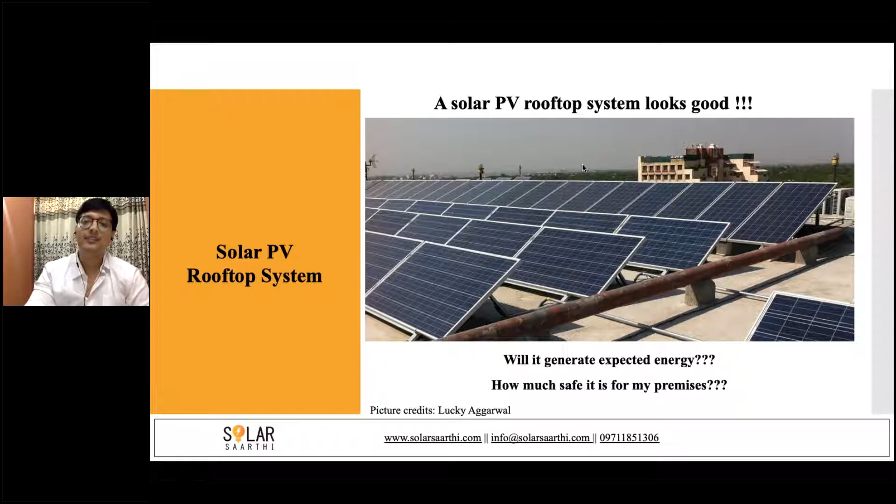Will it generate expected energy, and how safe is it for my premises? These two questions are always in the mind of an installer and the investor who's investing in the plant. So when we install a PV system, it really looks good, right? Blue modules and everything clean, but many things are very interdependent on that.

So there are some issues I'll highlight. First is this news, very famous, I think most of you might know this - that is the Walmart and Tesla issue. Tesla installed solar PV rooftop projects on Walmart warehouses over the country, and approximately 7 rooftops over there caught fire.

So what are the issues with this fire? There are two issues. One is the safety issue - my complete building is at risk, my premises workers are at risk when there is a fire. The second is when the fire is there, the complete project is shut down. That means I have a loss of energy. Energy means I have a loss of money. My returns will be affected because of that.

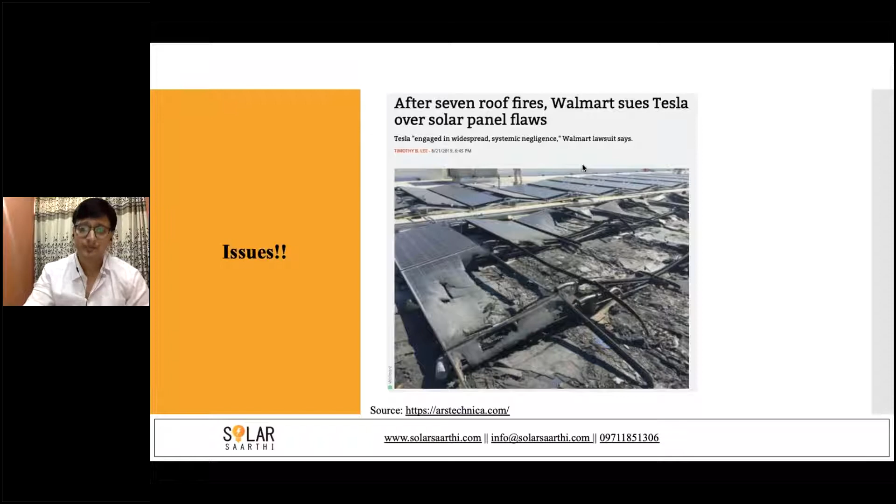Another issue, this one is from India. In Maharashtra, there was a shutdown of a PV rooftop project, and a team of 3 persons went there to rectify that. Unfortunately, one of the engineers died there on site because of a fire accident. So this issue is highlighting the safety of your system.

Now there are some statistics. There's a study done by TUV showing the major causes of defects in a solar PV rooftop project. Installation faults are the major cause at 55%, and the second at 25% goes to documentation and planning faults. So if I total around 70-80%, it goes completely to where workmanship is involved - where we plan a system, where we install a system, where we design a system. That's where the issues are.

There's another study by GIZ and PI Berlin, particularly for the Indian rooftop sector. Different underperforming rooftops were audited, and the findings are shown in the slide. The major issue was soiling - cleaning was not done.

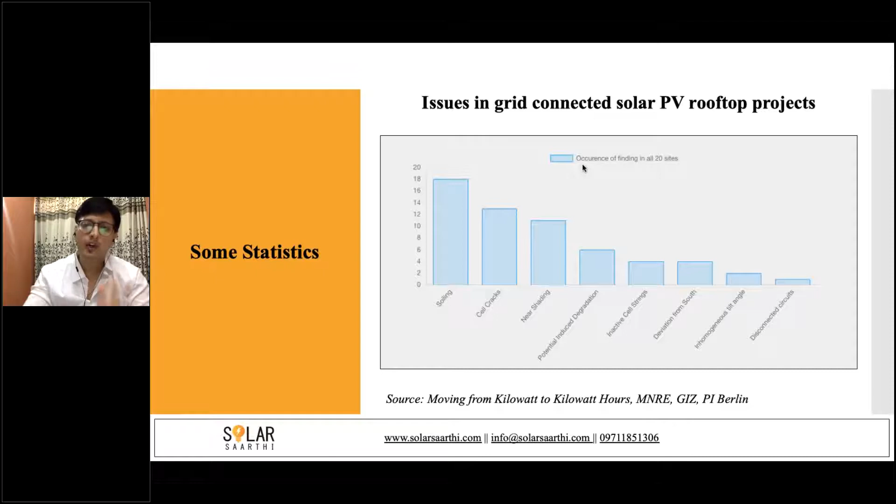Then cell cracks, again a workmanship issue - when we walk over the modules, when someone sits over the modules, there are cracks. Near shadings, again a planning issue - if there's a water tank or a tree beside my rooftop and a shadow comes, there will be a performance loss and a fire issue can occur. So all of these are workmanship issues that we have highlighted here.

I'll take you through the different project phases in project development. The very initial stage is feasibility and planning, then detailed design, then installation, commissioning, and operation and maintenance. All these different phases are interlinked. If I have wrong planning and feasibility study, that affects my design. If I have wrong design and detailed engineering, that affects my installation. If I have wrong installation and commissioning practice, that affects my O&M, and ultimately everything affects my energy generation and the safety risk of my premises.

So if I lose energy, I lose money. I'm not saying that if I'm losing energy, don't promote solar, or don't install solar on residential because you're getting nothing out of it. We have to take care of all the different phases of project development, and while planning we have to be very, very sure. I'll show you a few slides for that.

So I'll not highlight very major issues like micro cracks or module level or inverter level. I'll just limit myself to the planning stage and the BOS item stage. How, without investing a huge amount of money, we can save a lot - that I'll talk about in this slide.

So you can see this poor feasibility and planning. If while planning I've not gone to site for a site inspection while proposing a capacity to a client, what happens is, you can see in this first picture, there's a tree. There's no walkway, there's no way to access those modules to clean, and you can see how much dust is there on these modules.

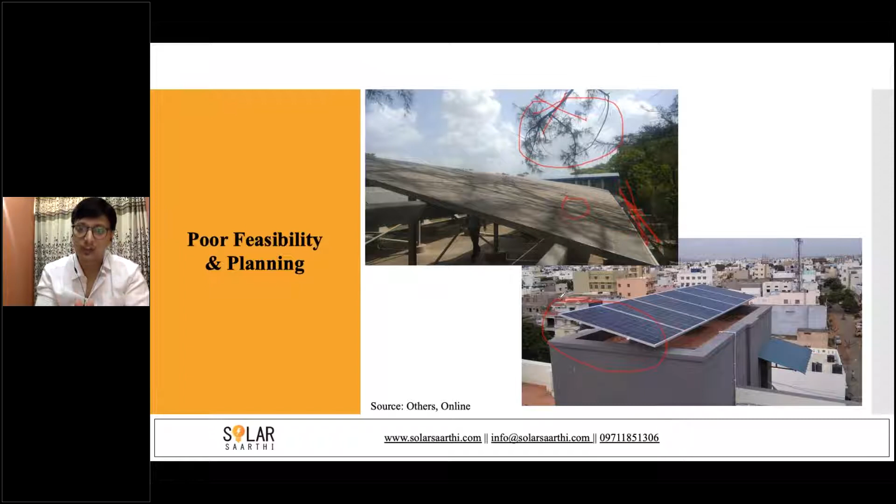Again, second picture is the same. You can see that on the mumty, these modules are coming out of the mumty or the premises area, or the parapet you can say. So these modules will experience very huge wind pressure, and again it is not safe to work on such systems. So it's like I install a system and go back, I never come back to the system. Ultimately, the loss is to the customer.

I'll just share one instance that happened with me a week ago. One of my EPC friends approached me and said, okay Lucky, you have to design a system around 30 kilowatt you have to install on this building. So I said, okay, you just give me the coordinates of the building.

So I conveyed my message to him, and the final result was, 'see Lucky, this is a tender, the capacity is already defined by the client, we are getting into this project, and anyhow you have to fit this.' So when we fit projects in such situations, issues like this will happen - the generation will be low, you'll have safety issues on that. So you have to be very careful when you're planning your system.

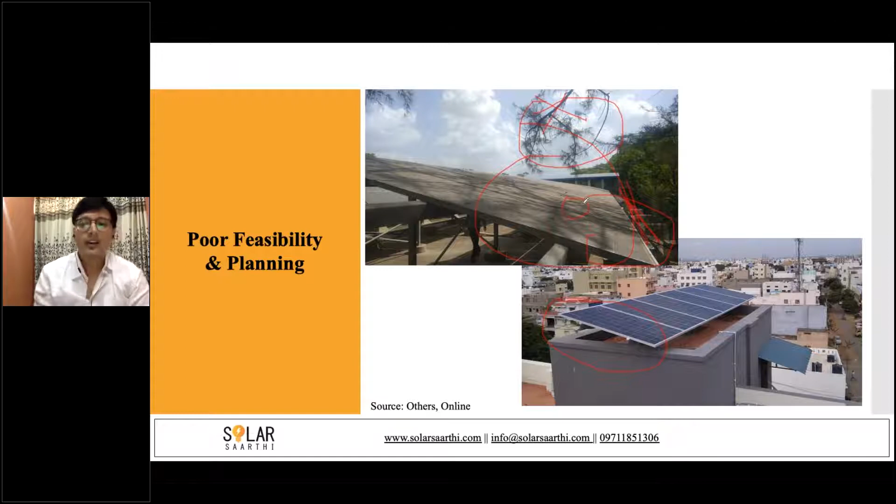Another important challenge that I have seen in my industry is DC connectors, MC4 connectors. People are not taking that very seriously. At present, if you see the range of DC connectors available in the market, it's from 25 rupees a pair to 100 rupees a pair. So there's a huge gap and huge different kinds of products that are available.

So when we buy an MC4 connector, what we usually ask the customer or manufacturer is how much the price is. But we never ask what is the contact resistance of this MC4 connector. If the contact resistance is higher for an MC4 connector, it will cause you energy losses, it will cause you safety issues, it will cause you a fire in a very worst situation. So you should be very technical and careful when procuring such small items.

This will not cause a very huge impact on your overall project cost. Let's say you are using a 50 rupee pair MC4 connector, and 10 pairs are used in your 10 kilowatt project. Right now the project cost of a 10 kilowatt system is something like 4 lakh rupees. So under 4 lakh, if you are investing in 10 MC4 pairs, that is 500 rupees - that is no cost compared to the bigger items. But this small cost will cause you a lot of issues later on in your O&M time and later on issues at the site.

So what are the major issues? Inferior quality, improper crimping. I think many of you would agree with me that on site we only do that quickly - we want to finish the site, so we don't have actual proper access to the tools.

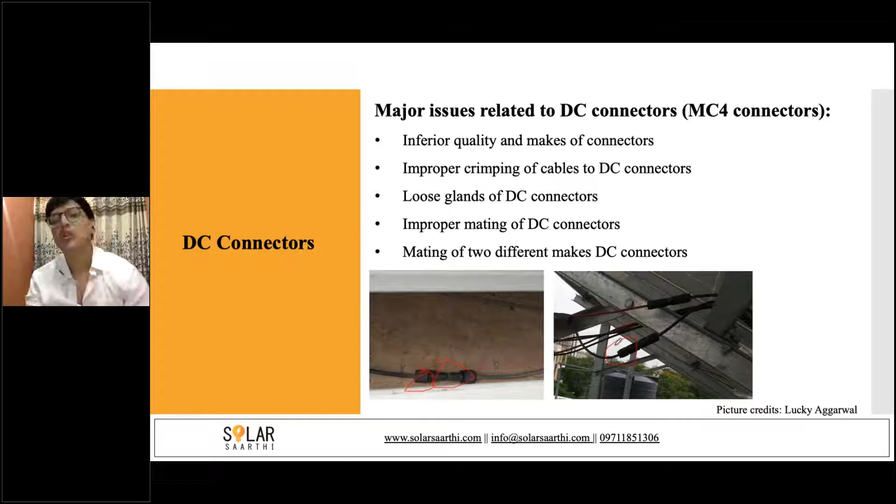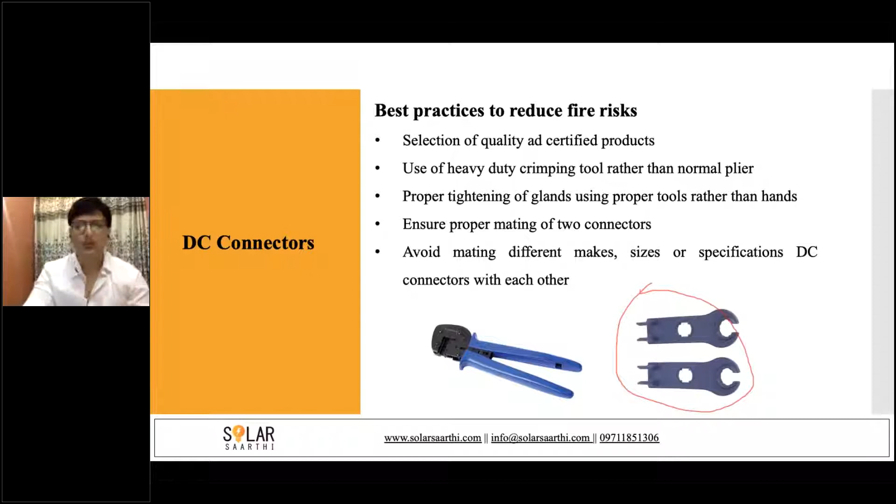But there are some very simple best practices you can adopt to reduce those risks and increase energy generation from your plant: selection of good quality components, using a heavy crimping tool, tightening of proper glands, using the proper tools to tighten and open your MC4 connectors. These tools are available and not very expensive, but by using them you can save your system from future damage.

Another thing is your DC combiner boxes. I think everybody will agree with me - nowadays your SPDs, isolators are on the inverter itself. So many people say what is the need of DC combiner boxes? But yes, there is a need - when you are doing maintenance, when there is a safety threat, you have that DC combiner box readily installed in your system with good design.

So what are the issues? Open combiner boxes that we do not close on site, drilling into the combiner boxes, improper gland sizing, many cables into a single gland. If you see this picture, there's a single gland with many cables in both glands. The purpose of a gland is to hold the cable so the stress on it is less. But when we do such practices, there's no use of that gland, and the result will be a fire case - a complete fire. If you install these combiner boxes beside your modules, 99% of the time we do that, then your module is also at risk of fire.

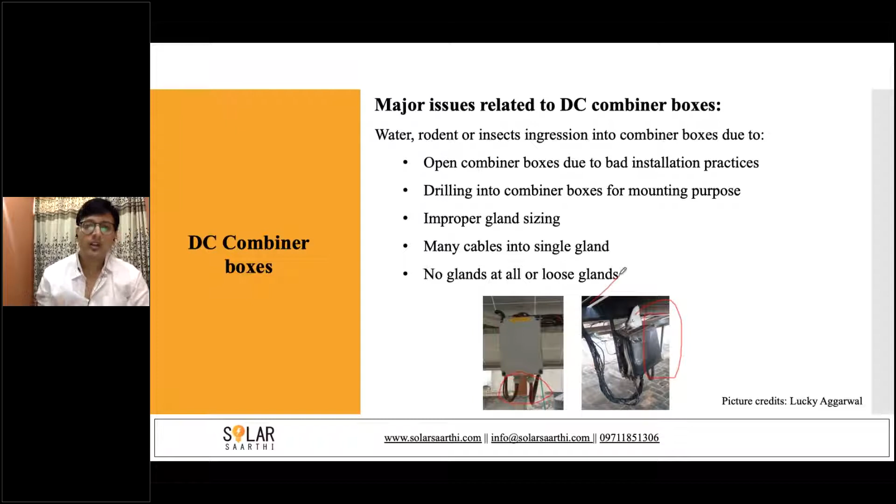So what are the best practices? Again, very simple: use one cable per gland. That should be the bylaw we follow in this solar PV rooftop industry particularly - one cable per gland, and the gland should be properly tightened and properly sized for that particular cable. If you are using a 2.5 square mm cable with a 6 square mm gland, there's no use of that gland.

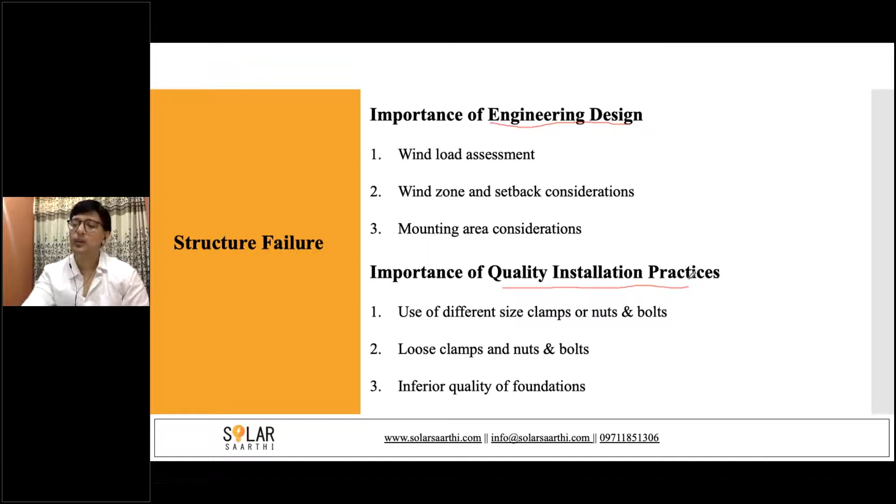So this was till now - 2-3 points I covered for electrical safety. Now structure is again a very important issue you need to follow. I showed you a picture where the complete system was uprooted. So I have quickly given two basic segments we should look upon: first is importance of engineering design, and then importance of quality installation practices. These two factors we should take care of whenever we are planning or installing a system.

So how is engineering design important? The very first is wind load assessment. The current practice is that we use one design for all systems - that is not true. If you are designing a system for a 2-story building in Delhi, that cannot be copied or replicated on a 20-floor building in Delhi, because the wind speed on 2 floors and 20 floors is very different. A 20-floor building will experience a much higher wind speed.

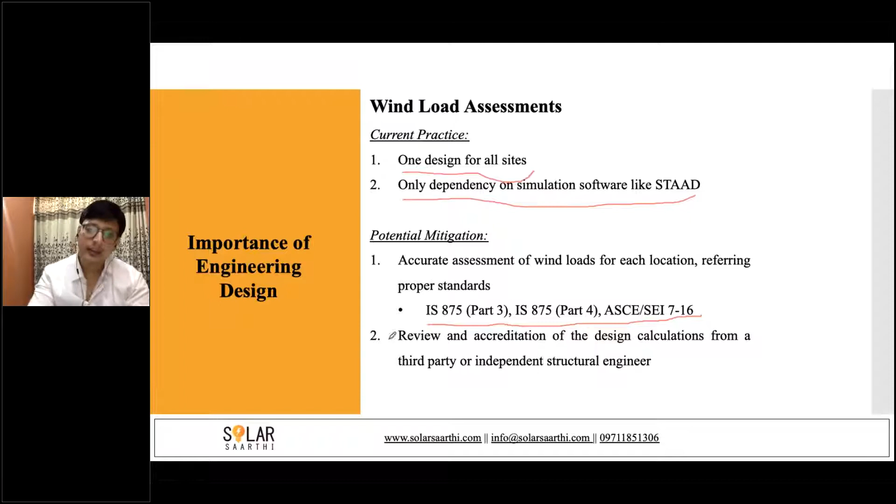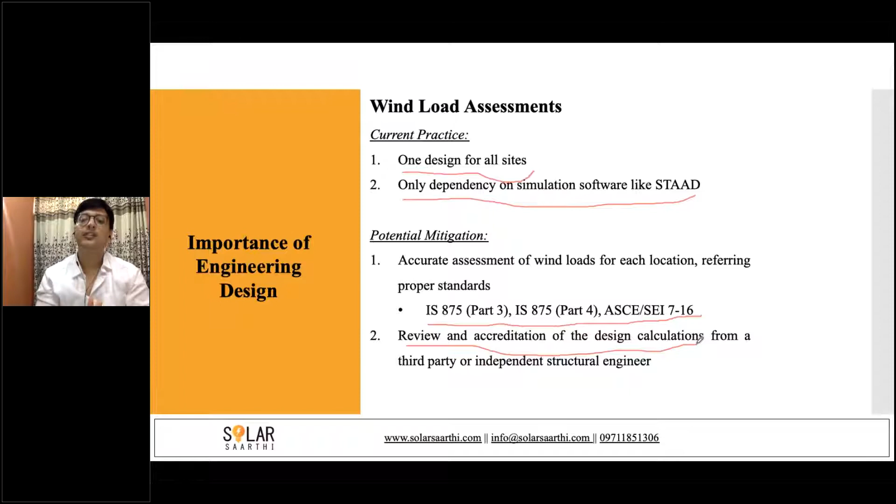So you need to design that system or structure based on that. Again, we have only dependency on simulation softwares, but simulation softwares are not the solution - they are a black box. Whatever you input, they'll give you an output. So if your wind load assessment input is not correct in a STAAD software, the output will not be correct. What is a very easy potential mitigation? Use Indian and international standards to calculate the accurate wind speed, then use that wind speed in your STAAD software or any software to calculate the structural design, and then get that design reviewed by an experienced independent structural engineer - not an electrical engineer, not a solar expert, but a structural engineer.

Wind zone - again in the first picture I have shown you, there's a second picture.

You can see these modules are outside the premises of my building roof.

As you can see in this picture, there's a study by Solar Under Storm Part 2. This shows that you can use standards like ASCE and other Indian standards to calculate wind zones. Once the wind zones are calculated, you have to see where you need to install the solar PV system. Usually the edges of the building experience very high wind speed.

That is why it is recommended to have a setback area or keep out. There will be two benefits of leaving a setback: first, the wind speed will not be into a danger zone; second, O&M - I can easily do operation and maintenance of my system.

This is linked to your planning and feasibility stage. During planning, if I have not done good planning for this particular array, then I have to face challenges during O&M stage or later when the customer is taking care of the system.

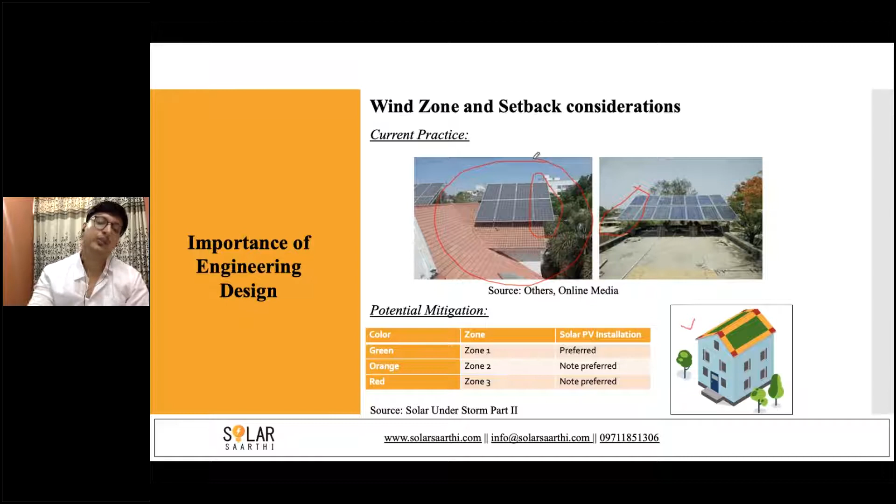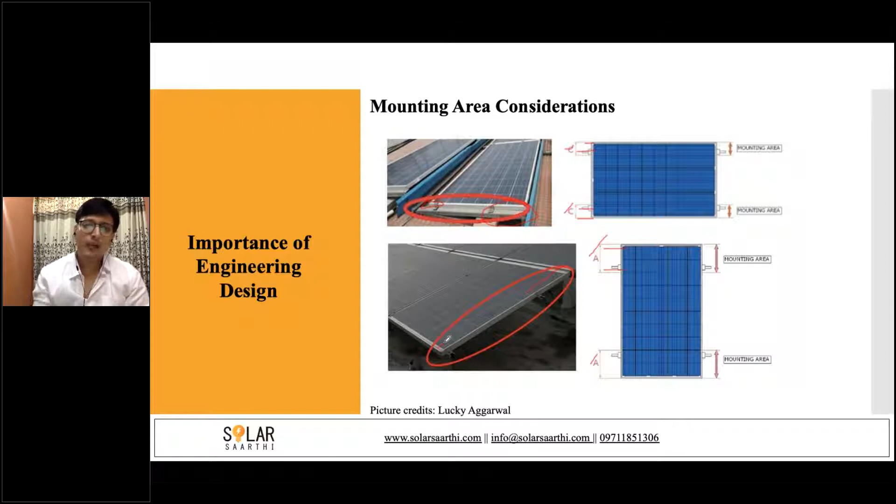I just tried to finish the project quickly, so I used that. But if such a situation persists, with passing time - contraction, expansion, vibrations - and if this nut loosens up, then your system will be flying in the air. It's very dangerous from the safety point of view and from the generation point of view.

Each module manufacturer and structure manufacturer usually gives you the torque range for tightening up the bolts. You have to mark a torque line on the nut bolt and tighten the structures accordingly. Again, we're not following that.

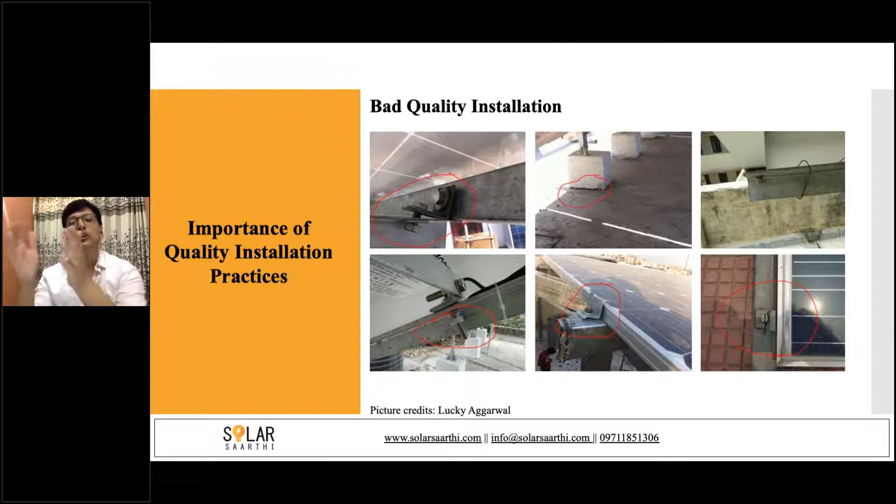I'll conclude my session here with three major insights you'll have to take care of. One is capacity building - you have to transfer knowledge from you to the actual installation team working there. Properly design your system, properly select the BOS items. That's all from my end. I'll open the session for questions now. Thank you all for listening to me for this webinar.

Thank you so much, Lucky. Really informative session, thank you for that information. I think you talked about various electrical issues, including structural issues. People should now be aware of the necessity of using good connectors, proper tools, crimping the wires, and proper earthing. For example, combiner boxes - they should consider the value of combiner boxes in PV installations, and the role of cables as well. So I think you touched on a part which is presently neglected in solar PV installations, because a lot of EPCs are coming up and are more concerned about pricing, but they neglect the quality part. So thank you for touching on that quality part.

Now I will request Hartwig, if there are any questions, we can take one right now. If there's any question coming up in the chat box, we can take just one question at the moment, the rest we can take in the Q&A session. I have two questions I'd like to transfer to Lucky. One question from the audience is how to select MC4 connectors. Could you maybe shed a little light on that?

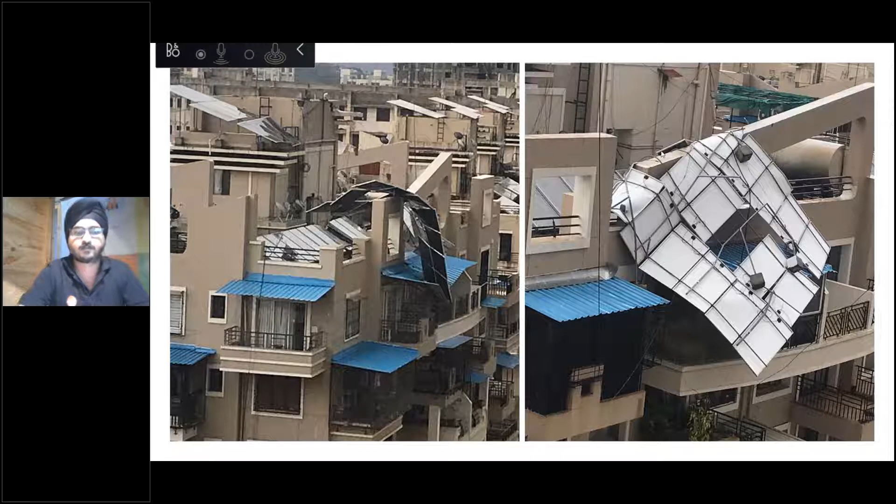I'll just touch on the small part. What are the factors which influence the roof? There are wind loads, and you also need to see the roof conditions, whether your roof is stable or not. And then also the fixation method, because it will decide whether it's able to sustain the wind speeds in that region. Also the inclination, weight, and size of the modules are very important while deciding the structures.

So you need to consider this basic part while designing structures, otherwise you are going to make a big mess. I hope you should consider this in your future installations.

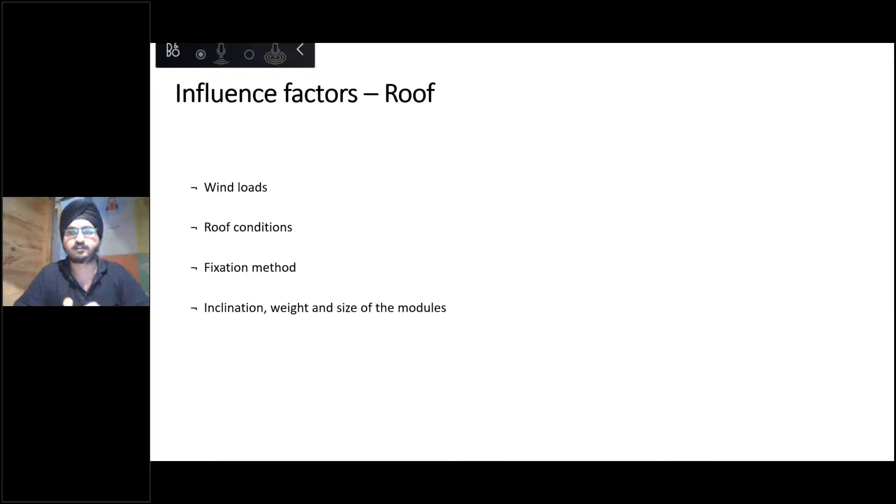As I said, apart from these, there's also wind speeds you need to consider based on local wind conditions. You need to understand that wind is different in different areas. In coastal areas, the wind pattern can be different. In open fields, it can be different. Rural, it can be different. And urbanized, it can be different.

So you need to consider not only the wind speed, but also the terrain category, because terrain category will define the effective load which the structure, roof, and module has to take. You need to make sure all these three things can take that wind load, because otherwise you will see pictures like this in your future installations.

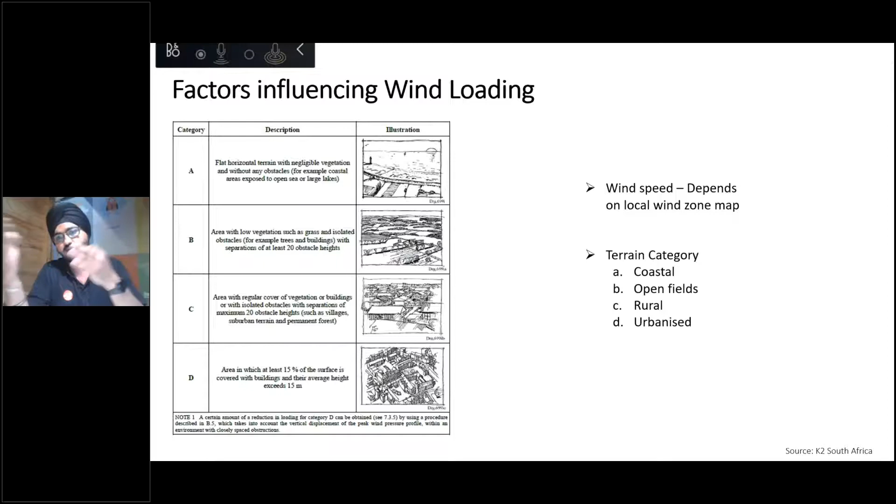If you plan your system better, you will also save cost. As Lucky talked about, you cannot install the panels on these zones basically. So I'll show you the first layout where 36 roof hooks were used, but it was not verified because it was on the zones.

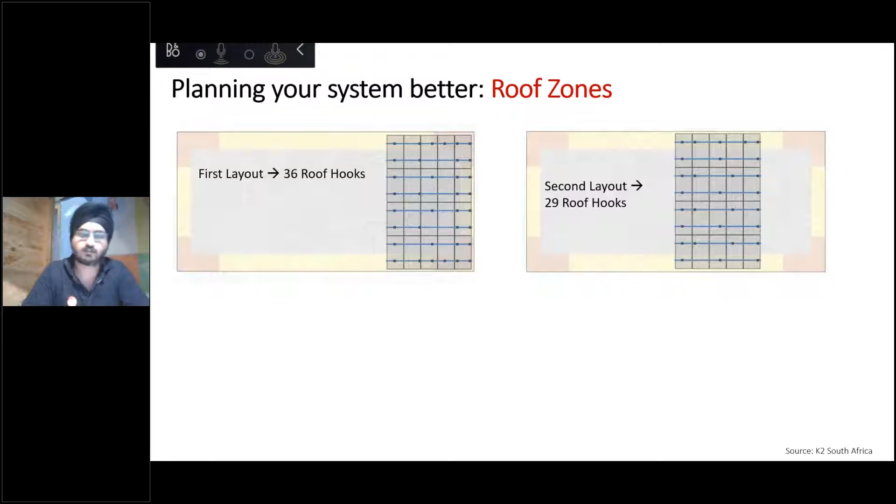In the second one, you put the solar PV somewhere more in the middle, but there you used 29 roof hooks, and that system is also not stable. But if you plan in a nicer way, you just need 24 roof hooks and the system would be verified. The idea of telling you this slide is that planning is really important.

Planning will also save you cost, and will help make sure the system is verified and able to sustain the wind loads. A lot of focus is put on electrical planning because of course it will give you a lot of money, since you are producing electricity. But if you neglect that basic part, if you neglect the structural part, you will damage, as I said, the solar inverter, solar panels, structure, and your reputation as well. So you should not do that.

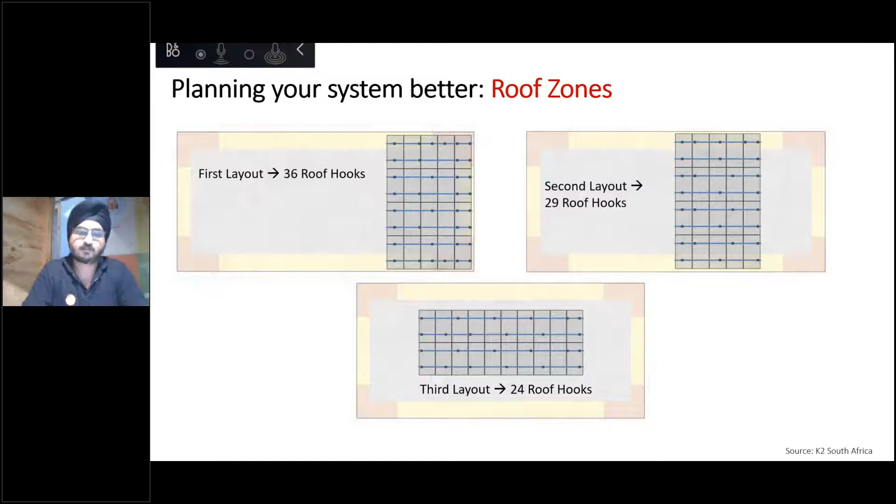Now, before going to the online tool, I would like to explain a little bit about our company. K2 Systems is a very old company, not just a recent one. It's more than 17 years old with more than 180 employees. If you talk about installed capacity, it's more than 10 gigawatts, and we have faced very few problems so far, and those problems were negligible. We have a lot of experience in solar PV installations, and we know what factors need to be considered, especially for the structures.

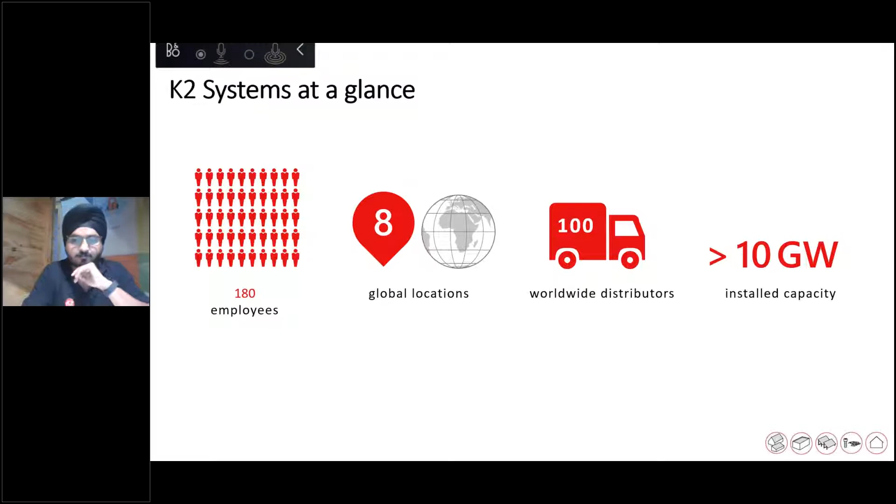And talk about our worldwide locations. You can see we are almost everywhere in the world. We have our subsidiaries in various parts of India, and soon we also like to establish one subsidiary in Delhi, where I'm sitting at. And if you talk about our worldwide installations, you see our installations has been everywhere in the world, whether it's from east to west or from north to south. We have our references all over the world.

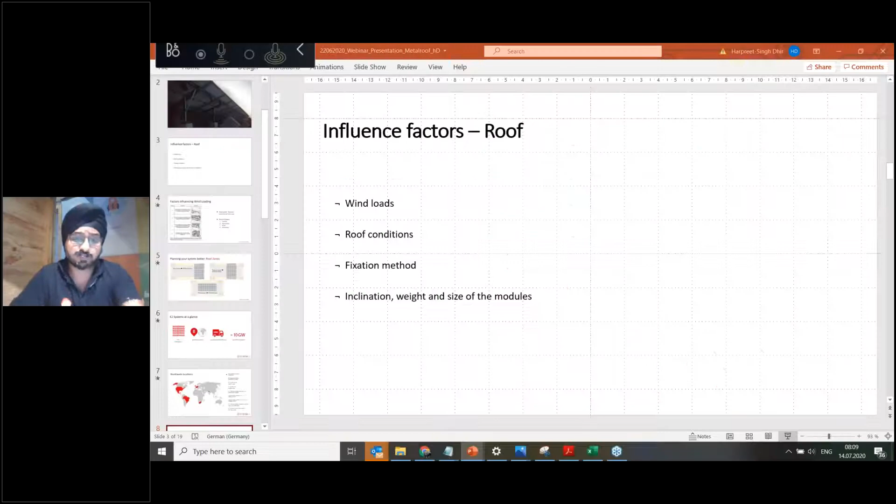So now, ladies and gentlemen, I would like to tell you about an online tool. There are some factors which I talked about in my presentation, what factors need to be considered. But now I would like to talk about an online tool called K2 Base, which is free of cost. This tool will help you do at least the mechanical planning in a very effective way. And if you really follow these steps which I will explain, you will be able to plan a smaller installation in less than 5 minutes. This will also ensure that your system is stable, because we have incorporated all the things in the software, and it will tell you, considering the wind load and wind patterns, whether your PV installation is verified or not. So I hope if you are excited to know about this tool, please type yes in the chat box.

Okay, so let's begin our online tool. As I said, this is a free of cost tool, and what you need to do in order to open an account on this, you need to go to this URL called base.k2-systems.com, and then you just need to click first log out to show you how you need to create, to be a member of this.

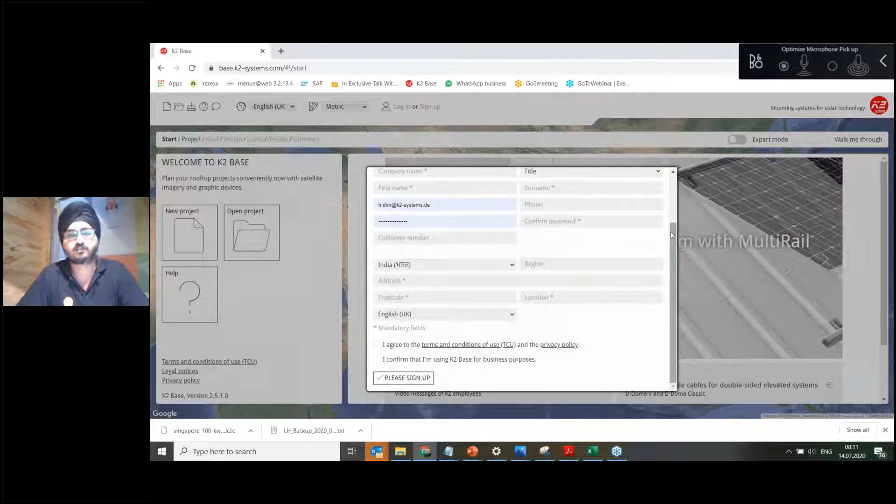So you just need to click on this sign up button, and it will ask about your company name, first name, and so on. You just need to fill up this small form, which will roughly take less than 1 minute, and then you need to click on this sign up button. Once you do this, we will receive your request, and normally within 24 hours, you will get a reply from us with your username and password, and then you can start planning your projects. So don't forget to do this step. Please do go to base.k2-systems.com and register yourself so that you can start planning your PV installations in K2 Base.

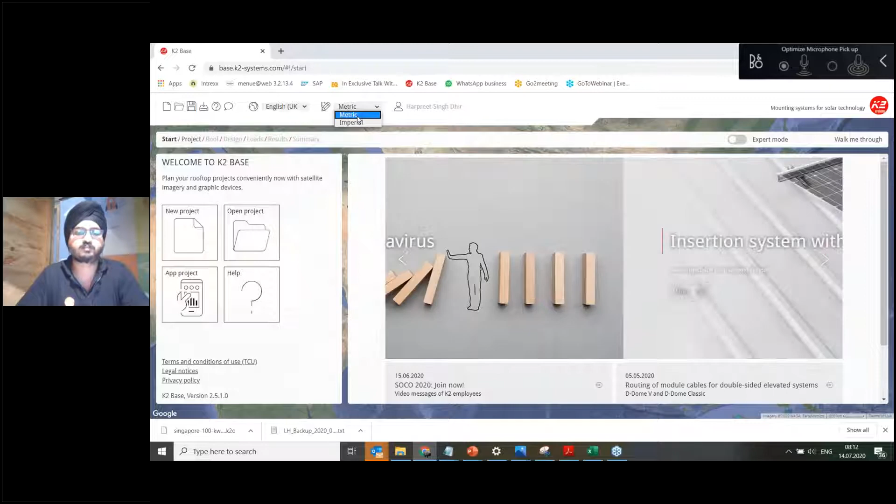So now let me go back to my username and password, let me log in inside the K2 Base. Before going to the project, I would like to tell you that in K2 Base, you can work in both metric and imperial. If you are interested in inches and so on, like in the US, you can choose imperial. And if you are interested in mm, you can choose metric. I normally recommend, my favorite is metric, because most of the solar module data sheets, all the data is mostly in millimeters, so it becomes easier to work in metric. But if you are more convenient using imperial, you can choose imperial as well. And this tool is available in 18 different languages.

And then you can also download this project file, it has an extension called .k2o. You can also ask Sherpa, it's like a robot which will answer your questions. You can directly write to Sherpa as well. And then basically in this online tool, you just need 4 steps, ladies and gentlemen, just 4 steps. You can do the complete mechanical planning using this K2 Base.

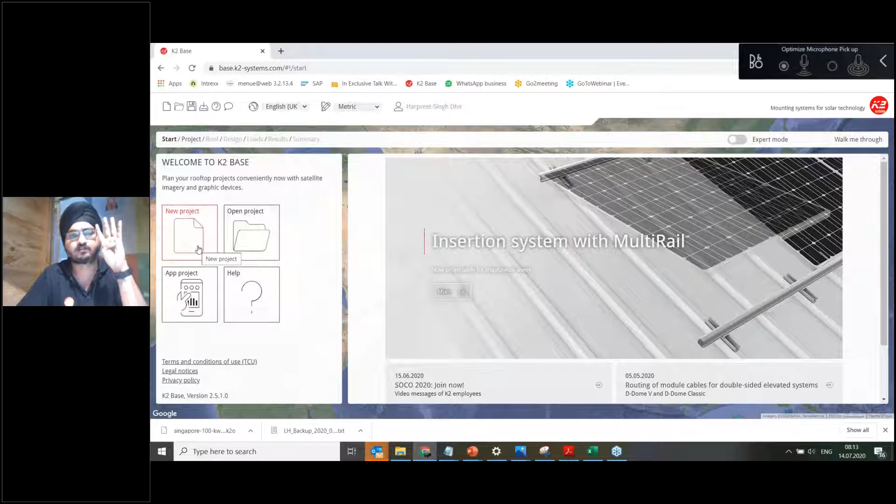So first I will move to the first part, which I will click, called project. I will click on new project. The first part basically is defining the location of your project, nothing else, just defining the basic things. So what I'll do is I've chosen a location in Bangalore, and I will name this project as Bangalore project, and author is myself. And then you can choose a customer, and I can choose a customer, in this case, from Lucky Solar Tech Sarthi, and for example Lucky Agarwal is the customer name. So the first part is finished, I've done the basic part. I define the customer name, contact. You can leave it blank also, these are not mandatory. Mandatory is what you will do on the software, or what the software will give you in return.

So once you've done the first part, project, then the second part is the roof. You need to click on the roof, and then you need to zoom in on this Google map. You can either choose hybrid or satellite image, but I prefer a hybrid image. And then what you have to do is, similar to other simulation tools like Helioscope etc., you can construct a roof on it. You need to click on this add button, and then define whether it's a mono-pitch roof, a gable roof, or a flat roof. In this case, my roof is flat, so I will click on flat roof, and I will click on rectangle, and then I will click on add. And then I take one of the edges using my mouse and draw over it.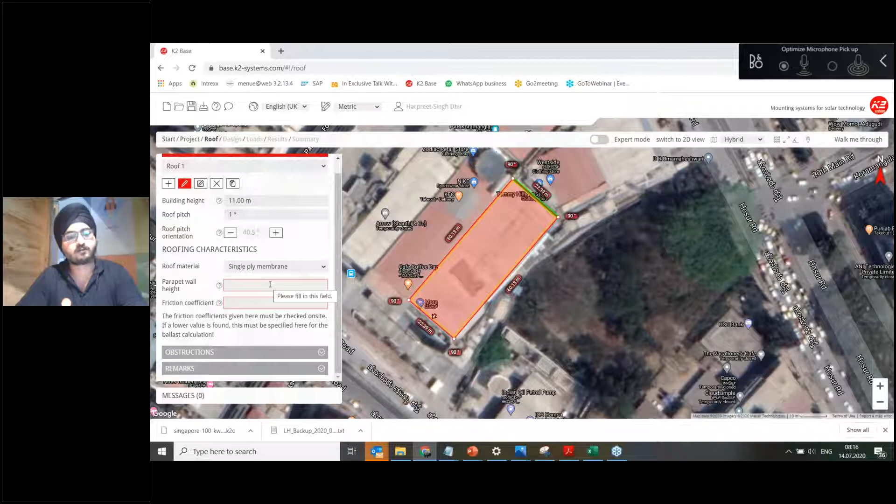And then I also will define the parapet wall, because the parapet wall will also give you some kind of shading. So you can define this, and also most of the rooftops in India come with a parapet wall, and people also say this is a safety wall. So it's normally 1 meter in height, and then you can also set the friction coefficient based on the material of the roof. In this case, it's 0.6.

So ladies and gentlemen, I will be touching only the basic part of the K2 base. The advanced version, I will do in another separate webinar, considering the time constraints. So don't worry about that.

So the second part is finished. The roof part is finished now. Now let's begin with the third part, which is the most important part.

I would like to highlight here that you can also construct pathways for cleaning if you need, and you can also do a shading analysis for obstructions as well. I will show that if you're interested in the advanced version of the K2 base webinar. But I would like to highlight that this is also possible with the K2 base. You can do the shadow analysis also, and you can create walkways as well.

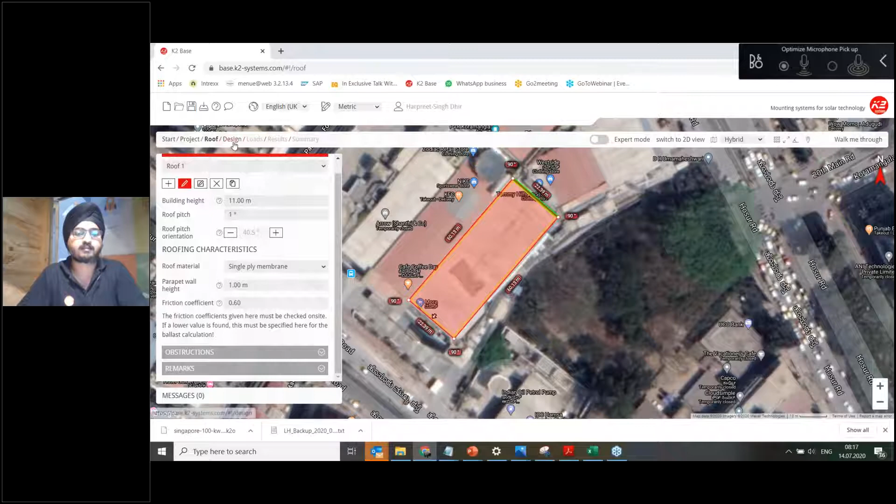And then the third part, ladies and gentlemen - we are finished with the two parts. Then you click on design. And in the design, you need to define which solar modules you want to use for this project.

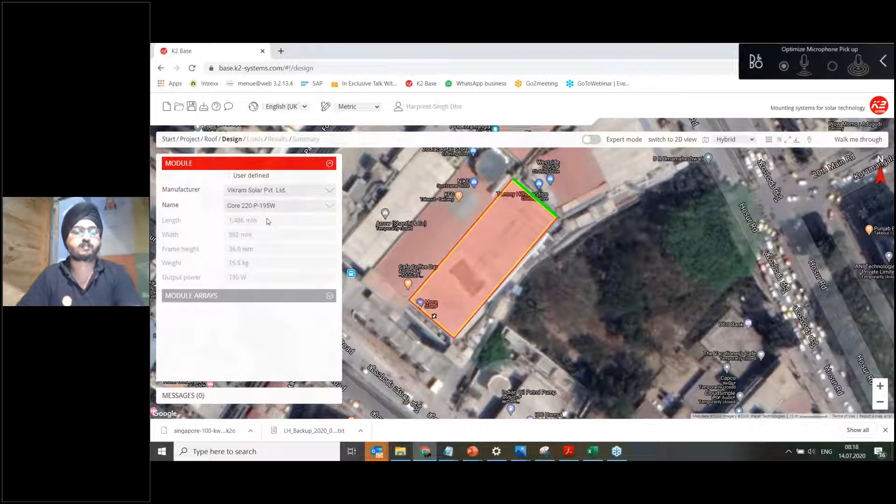So I will take one of the popular module manufacturers, in this case Vikram Solar, an Indian solar module manufacturer, and I will consider, for example, a higher watt module - let's say Eldora 335 watt. And then once I define the module, I will define the module array.

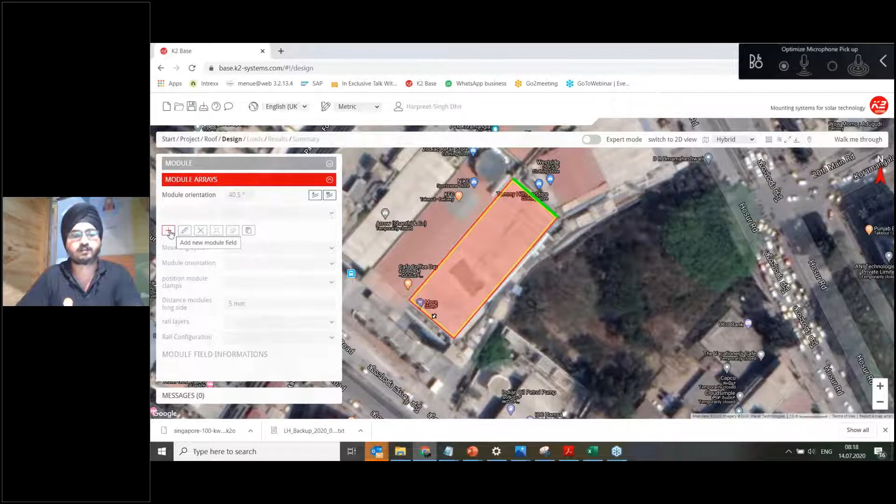So you need to click on module array, and then you need to click, the same way you clicked the plus button for creating a roof, the plus button here for creating a module field as well. So just click on the module field, and now it will show you all the products available for the flat roof, and you can see the new feature which was just recently incorporated.

It will also tell you which would be the most favorable product for this installation. So it's showing - if you just want a single-side-facing module, then you click on S-Dome V10. And if you want double-sided facing, in this case southwest and southeast facing module, then you can use D-Dome V10. But I will choose S-Dome V10 in this case.

And then I had an option of either choosing complete roof or a module field. So if you already have a module layout defined by yourself, I recommend you click using module field. But if you haven't defined one, and just want to utilize the complete roof for the solar PV installation, then just simply click on complete roof.

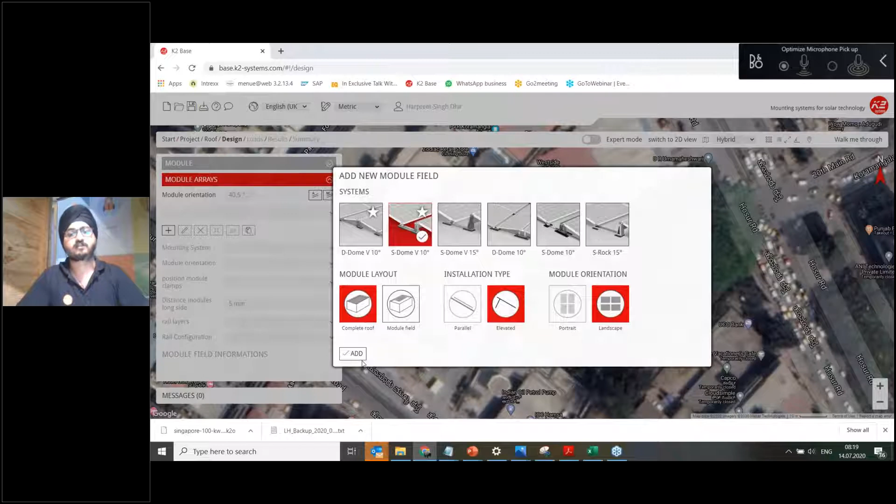So I want to install maximum on my roof, on this roof. So I just click on complete roof, and then I just click on add.

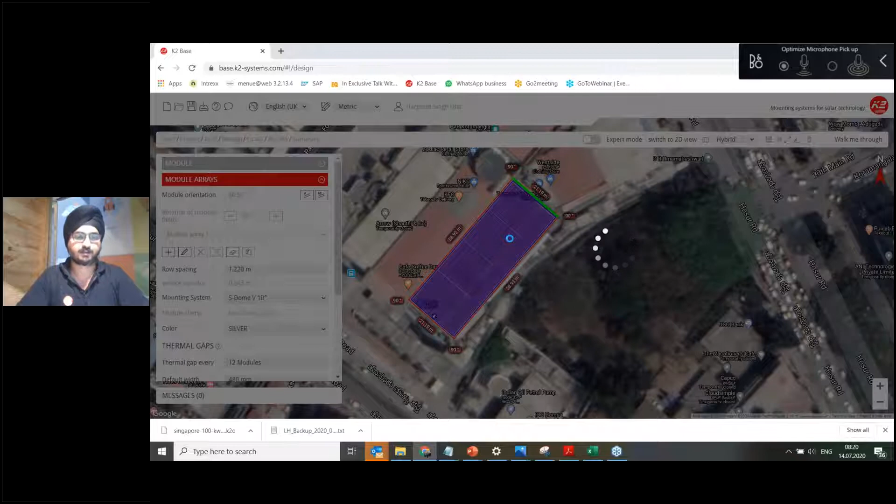So a module field has been created. You can see in the bottom, this is a PV installation of roughly 157 kilowatts. You can also simulate using a double-sided PV installation, and you'll see the PV installation will increase, because then you don't have to leave much space in between the rows. So you can play with this as well.

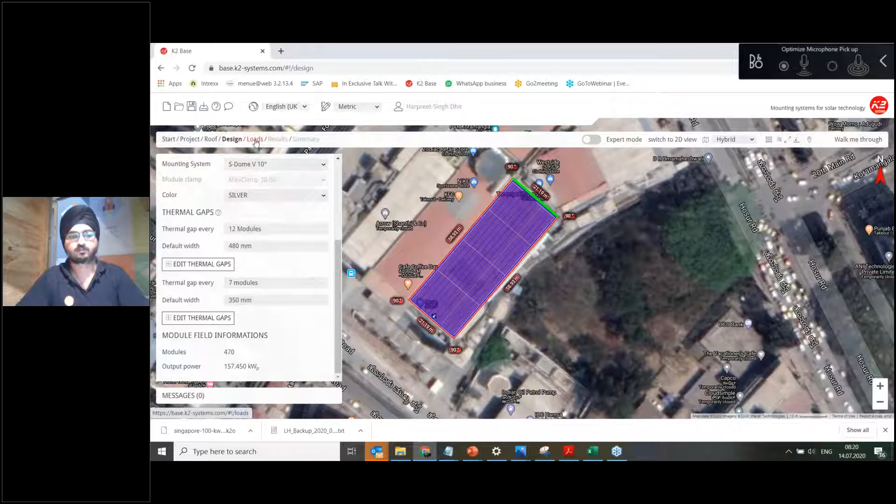So you're complete with the third step, ladies and gentlemen. So quickly complete it. Now you're complete with the design part. Now comes the last part, and the most important part, which is an indissoluble part of PV planning: consideration of loads. I will click on loads.

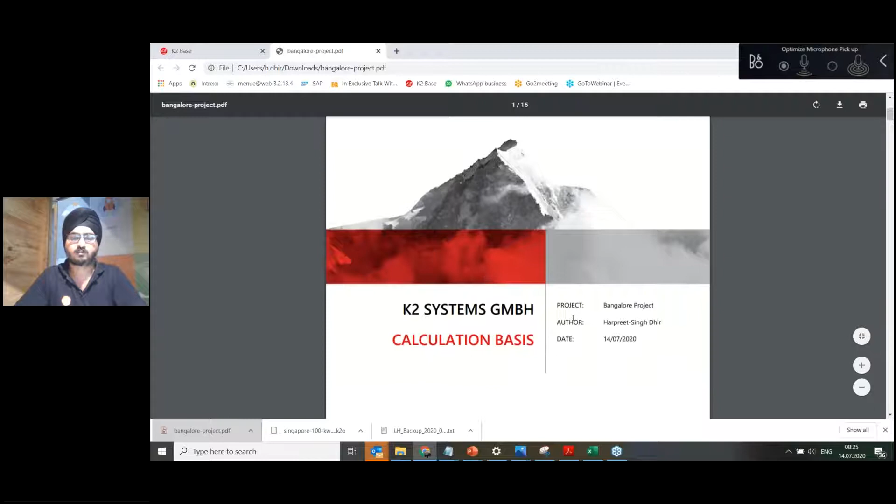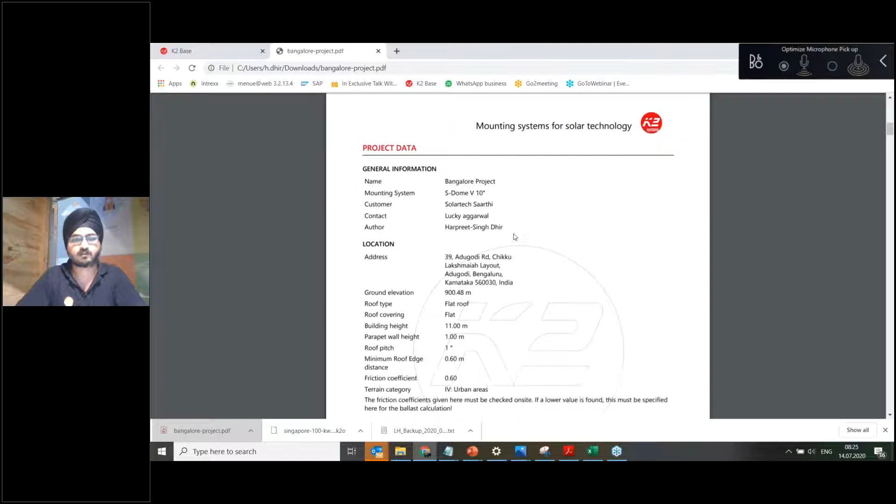So you see now a 15-page report has been created, and the first page talks about the project, the author, and the date when it's done - it's done today's date. And then the report is divided into various parts. The first part talks about the project data, the address, the type of the roof, the customer - Solartech Saarthi in this case.

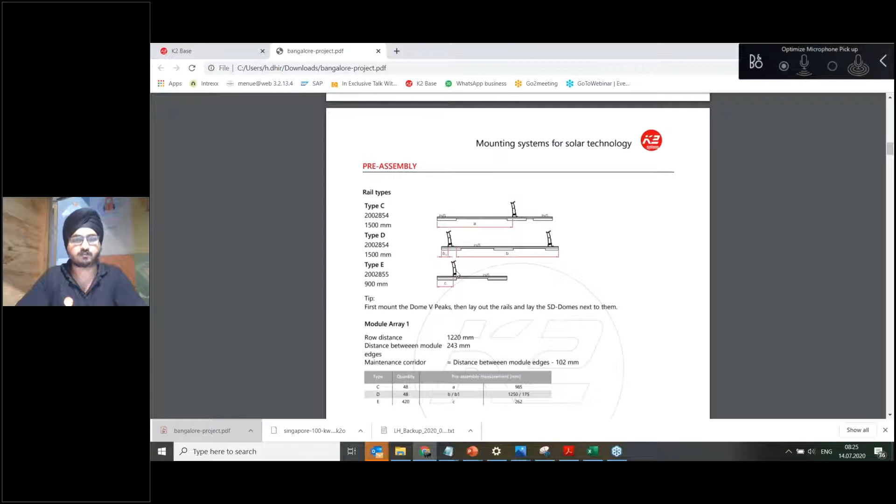Loads, modules you consider, then also pre-assembly instructions with diagrams, then also the assembly plan. You can actually take a printout of this assembly plan and give it to your installer - this will make the life of the installer very easy.

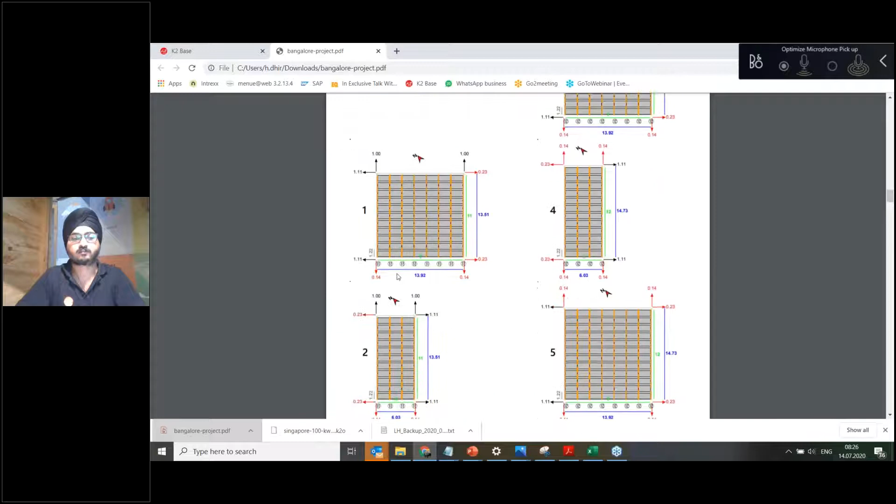Then it talks about various loads acting on it based on defining each block. So this block of 157 kilowatt is divided into 8 blocks, and for each block it will tell you the forces on the edges and the sides. So each block it will take.

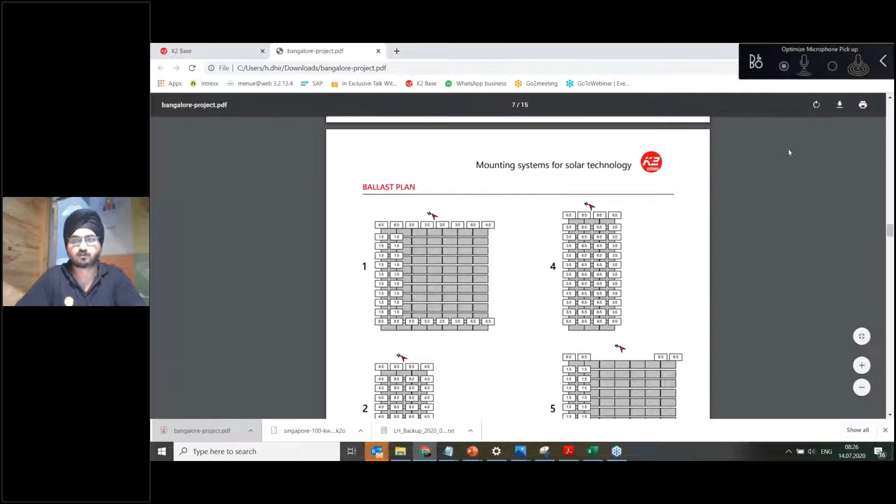Then it talks about the ballast plan, how much ballast you have to put - this will also talk about that as well. So you can zoom in and see the ballast values are not so high, so you don't need to put ballast everywhere. So for each block you will have an individual ballast plan as well.

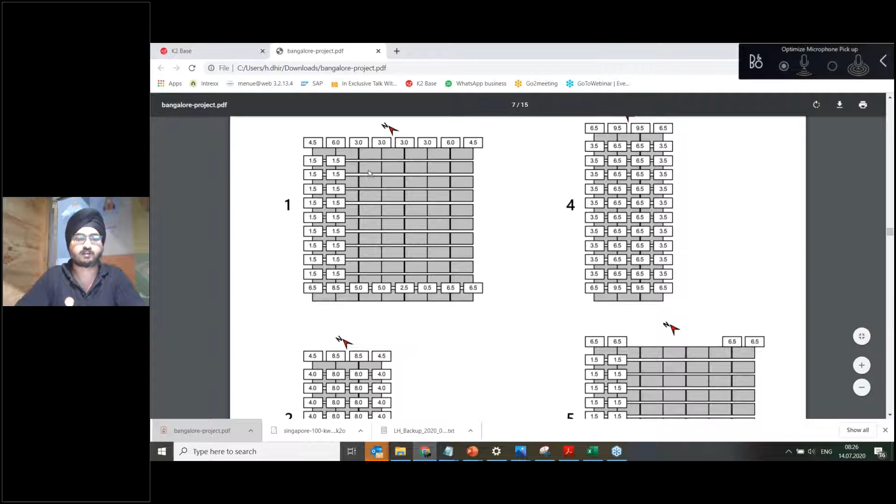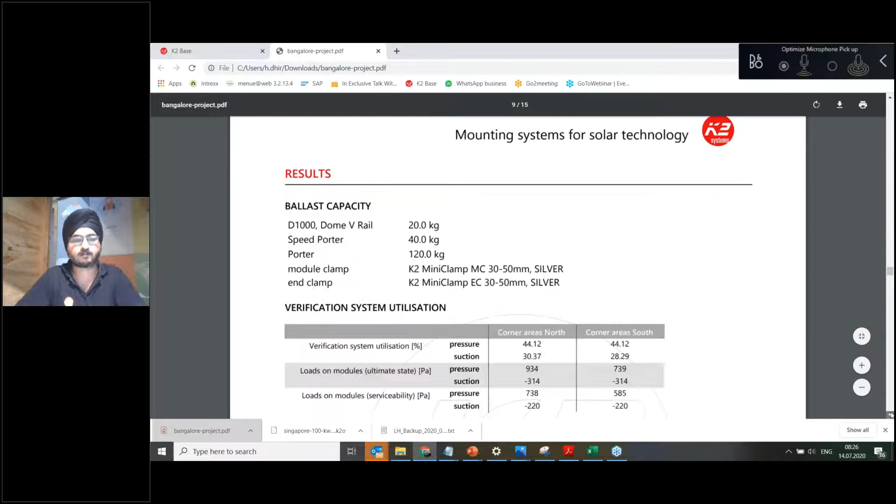Yeah, that's it. Now, very important, this talks about the dead load. In this case, it's 13,062 kilograms of dead load you are putting for this 157 kilowatt installation.

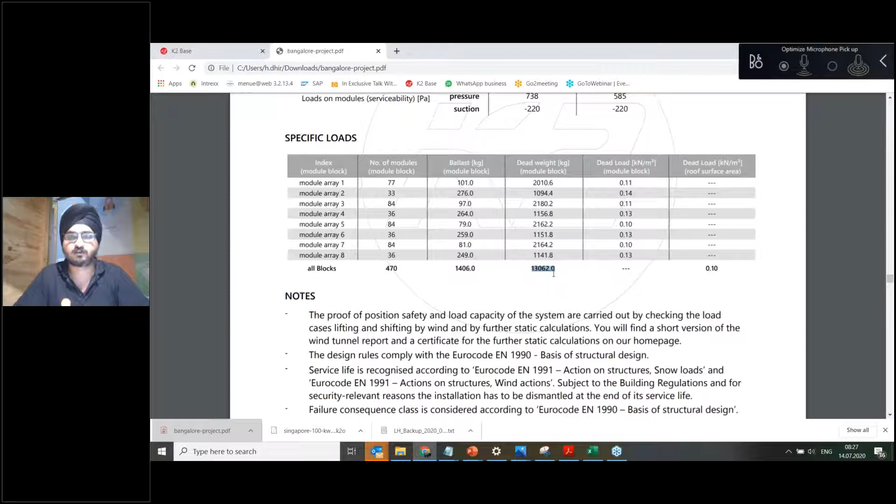Because this tool is verified, this will be considered. We normally give you 12 years of warranty for solar structures, but we don't guarantee whether your roof would be able to bear this much weight of the complete system. In this case, the complete weight of module and structure comes out to be 13,062 kilograms. So for that, you need to hire a structural engineer, because it's the task of a structural engineer to assess whether your roof is strong enough to sustain that much load or not.

So it's not just that, as mentioned by Lucky in this presentation as well, you need a structural expert who will ensure that this roof is safe to bear that much load of a solar system. So we even give values for the structural engineer, which make the task easy. You just need to go to the structural engineer and say, we have this much weight we are going to put on our roof, please tell us whether our roof is strong enough to bear that weight or not. Once he says yes, then only you should go ahead with the next steps.

But on the other hand, what we found out is that for a smaller installation, people aren't interested in putting extra money for hiring a structural engineer. In that case, if you are confident enough yourself that your roof is very strong, then you can also take your decision, but we will not recommend that. It's better to hire a structural engineer and make sure your system is able to withstand that much dead load of the PV modules and structures.

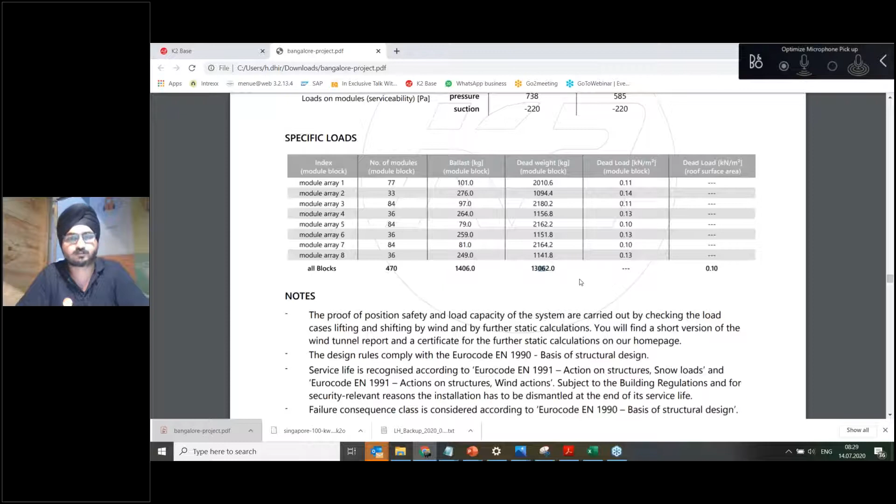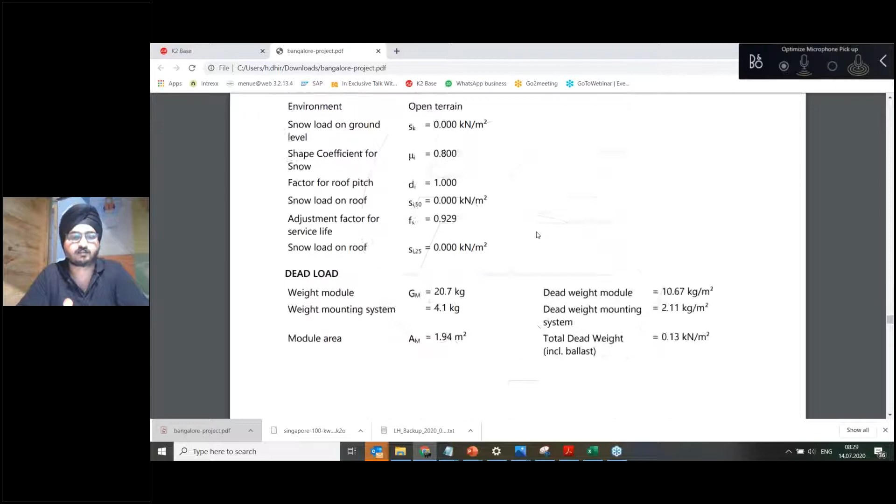Then the interesting part, it talks about the structural analysis, various formulas, various stress strain velocities it has considered in the PV system installations. And then it talks about the way stress is developed from top to bottom, with diagrams. Then in the end, it talks about the bill of materials.

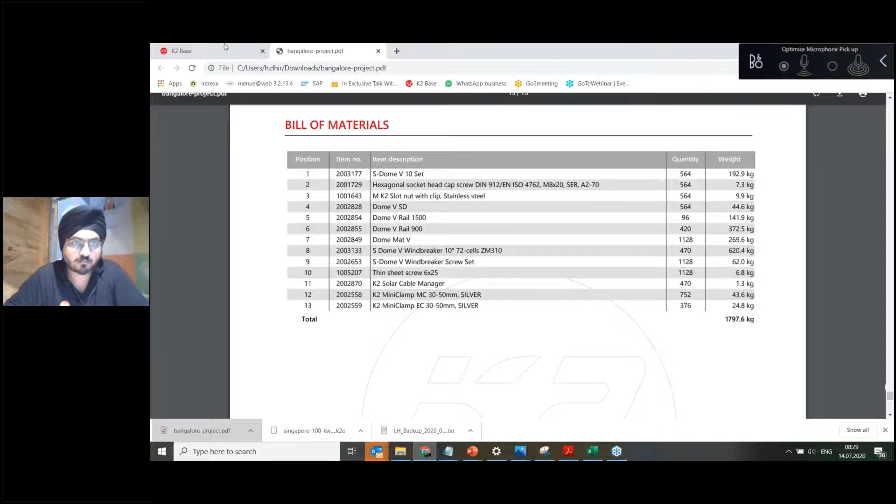I'd also like to highlight here that you can get a ballast value in terms of number of stones, just by clicking here. You define the number of stones and the weight of each stone, for example 5 kilograms. Then instead of giving values in kilograms, it will give you the ballast plan in number of stones.

Second, you can also download the ballast plan. I will download the ballast plan here instead of the complete project. This file is smaller, so it should be faster to download. Now you see it talks about the ballast plan in terms of the number of stones.

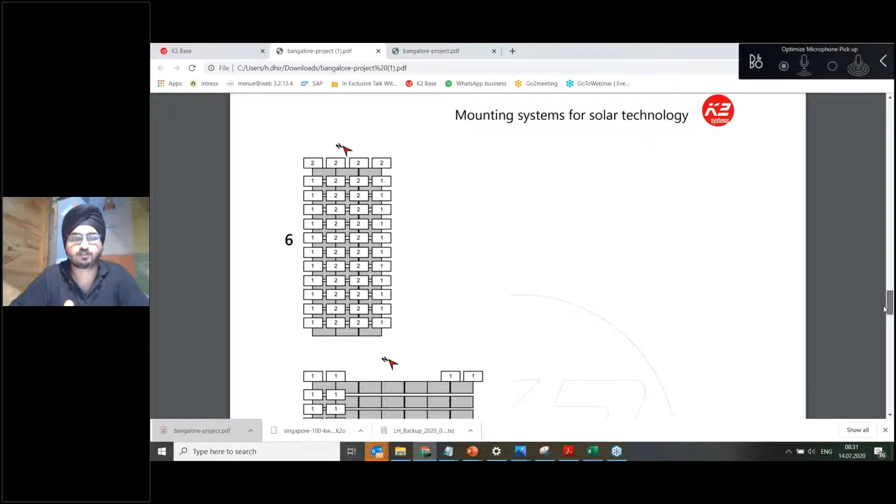So the weight of stone used is 5 kilograms. For example, here you need to use 2 stones of 5 kilograms each, and for each of these arrays you can calculate it. It becomes easier for you to calculate how many stones you need for your PV projects. So these figures are also possible using K2 Base.

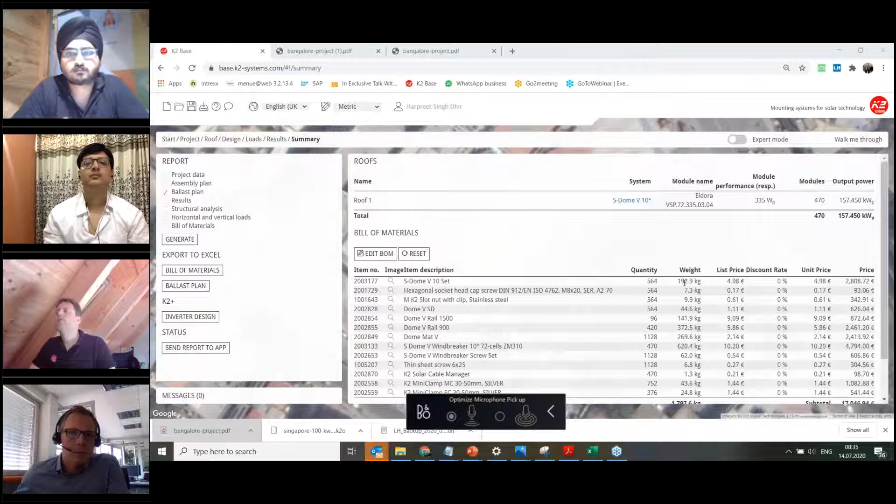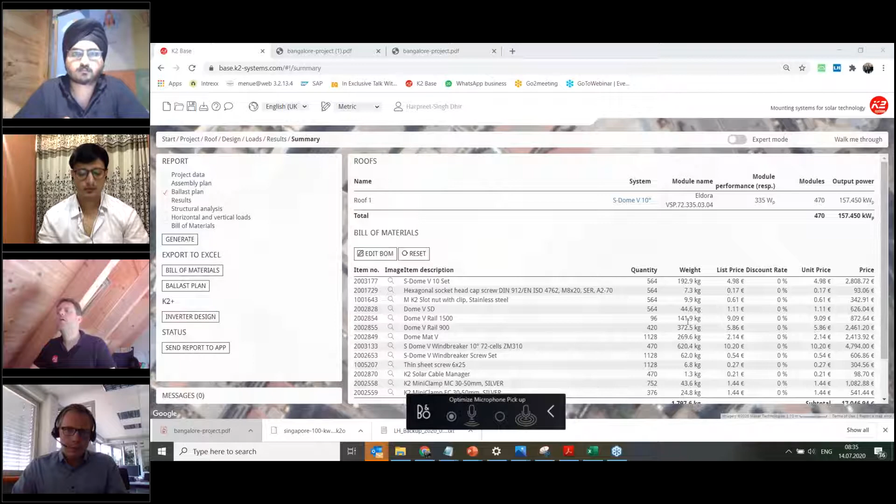Next question, Hartwig. There is a question from Shirsha, so I unmute microphone now. Not working for whatever reason. Is it working now? No, okay. So we see a question from Mahindra, so I unmute the microphone now. Also not working for whatever reason.

So anyway, in the meantime, I got a couple of questions in the chat box I'd like to transfer to the audience. The first question, coming from the audience: Lucky, what is your opinion on the quality of manpower in the solar industry?

Okay, thank you for this question, Harpreet. There's no opinion on that. What I told in my presentation was there is a gap between the knowledge transfer from the upper management to the one who are working on the field. So as per me, there should be a proper workmanship plan, there should be a workmanship standard operating procedure so that they can practice, and they can install your system on site.

And second, they should be having some proper tools, as I discussed about those crimping tools and other things. If I have a shortage of tools at my site, anyhow I have to complete my site and give it to you, right? So proper capacity building and proper resources, they should be provided.

All right, thank you. There was another question that was pretty interesting, I would like to address to you, Lucky. One asked, what steps do we need to adapt to avoid fire accidents? In case of fire, how to handle fire without fear of electrocution.

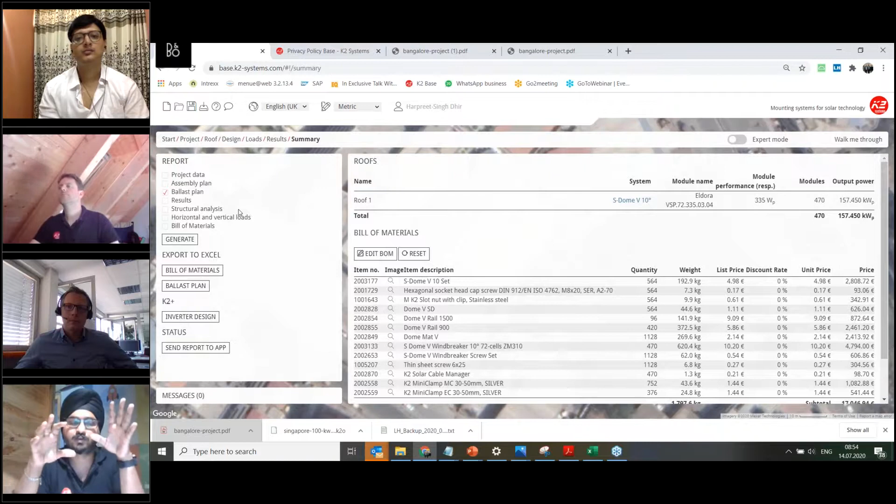I can show you my screen. Once you finish your K2 base planning, basically the mechanical planning, it's also possible - in order to save time - you can also do the inverter designing. So you don't need to go to step one again, making a module layout once again, choosing the location, etc. With the same tool, you can also do your string sizing and so on.

So for that you just need to use our K2 Plus, and once you finish with the mechanical planning, you can go do the inverter designing by clicking on the inverter K2 Plus. Then you can see we have a tie-up with Fronius, Kostal, SMA, and Solar Edge.